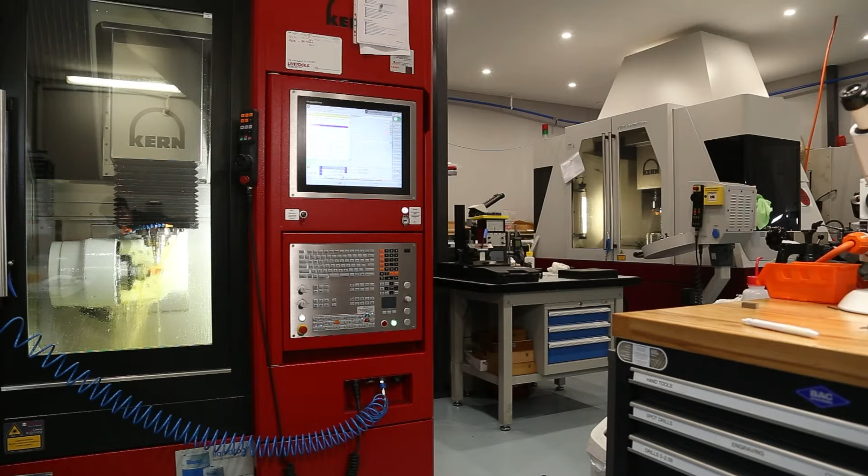I've got a little presentation here. It's going to be a bit of a ramble, but I'm going to try my best to involve some audiovisual stuff that maybe I couldn't have shared in person, just to describe our journey specifically with Kern, but more about high precision and ultra high precision manufacturing.

So my presentation is entitled Breeding Kangaroos on the Top of Mont Blanc, and it's kind of cheekily titled, but it revolves around how my dad and I almost accidentally started one of the highest precision workshops in Australia. And if I was to do it again, if I went back in time and started this journey all from the start, it would be as difficult as breeding a kangaroo on the top of Mont Blanc.

You'll see as I tell the story that we were green, more than green. We were just seeds, basically, not even trees and saplings, but we somehow made it. Hopefully that gives you guys some inspiration that if we could do it here in Australia, in the corner of the world, maybe you guys in America and Germany and wherever else you're from are more than able to as well.

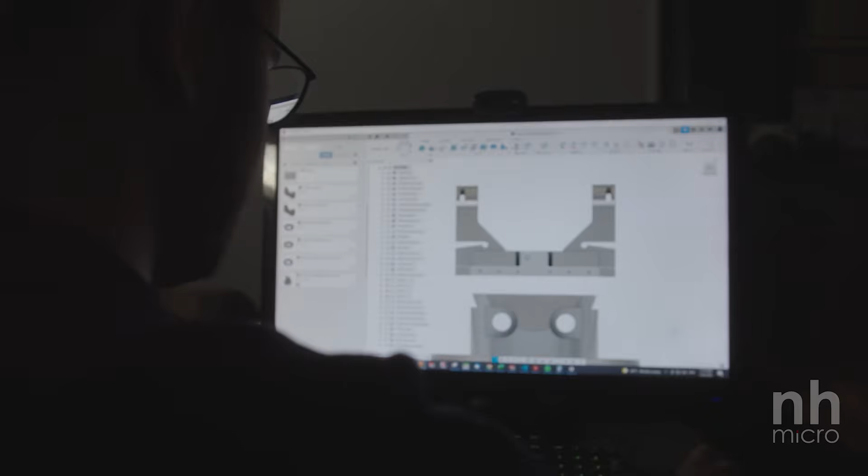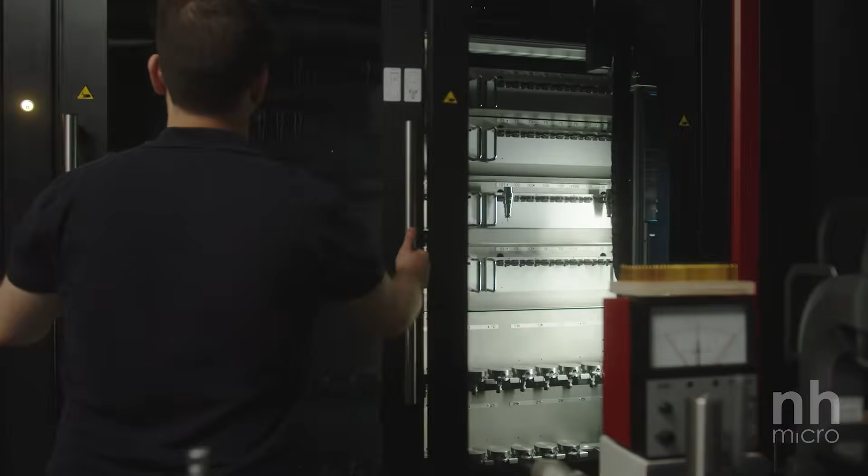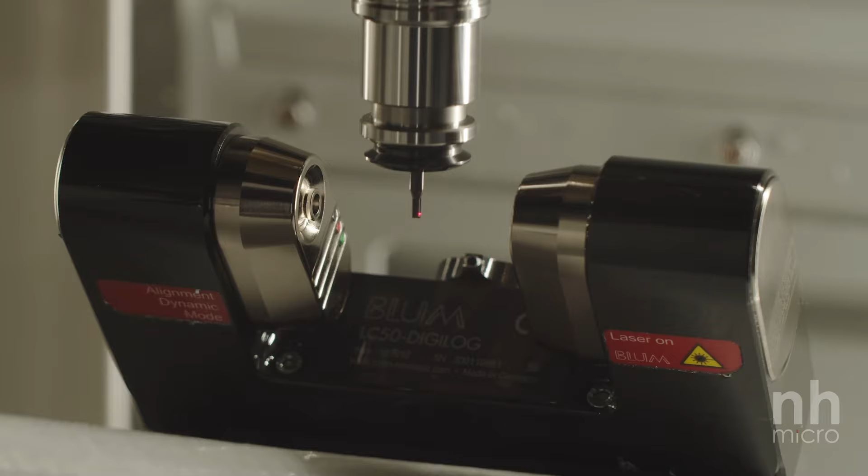As I said, my name is Josh and I'm a fourth generation watchmaker. I also run an ultra high precision job shop called NH Micro that services parallel precision industries. We have two companies operating from the same workshop here in Sydney, Australia, with about 180-ish square meters of factory, very tight, and of that about 95 to 100 square meters is factory floor, the rest being storage and office space. That's about 1,000 square feet. We packed in a lot of stuff, and we predominantly started off making watches. That was our core business.

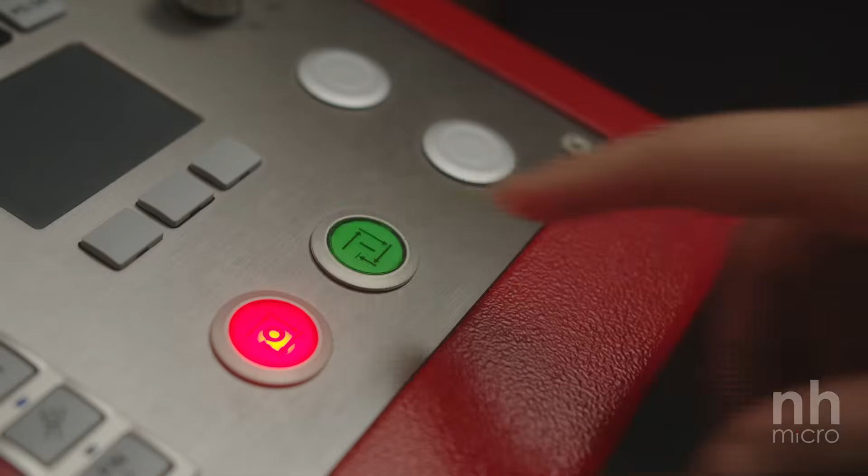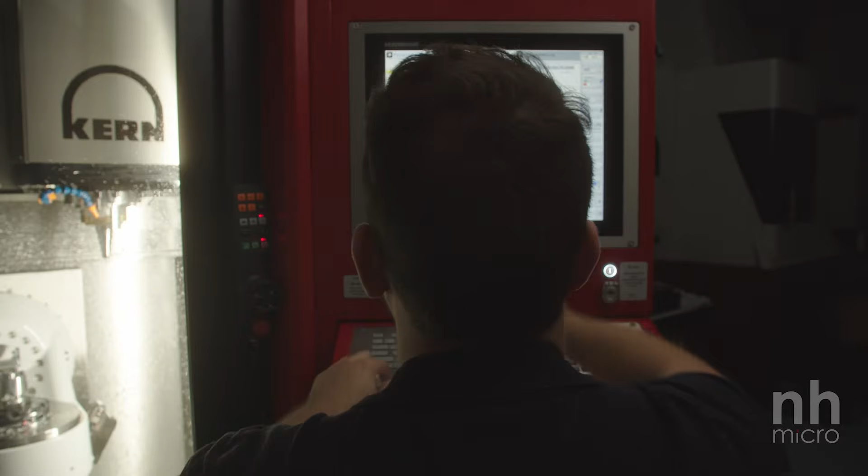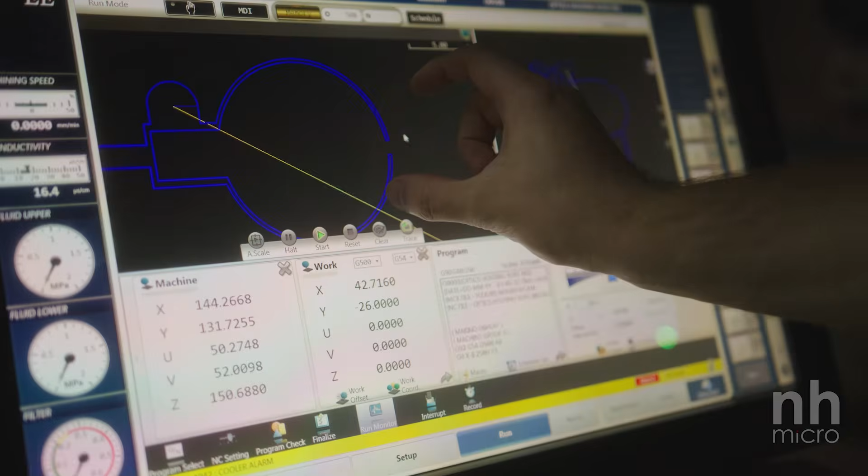So we built a workshop around watchmaking, fairly vertically integrated. We do everything from design, aesthetic design, mechanical design, manufacturing, assembly, adjustment, hand finishing, and then sales and after-sales service for our watchmaking company. Over time, that attracted the attention of local industries that were parallel to watchmaking - the medical sector, aerospace, scientific instrumentation, all these different high-need sectors, I guess was the best way to describe it. They all have very high needs.

We started serving those industries, and over time, we realized that maybe there's a bit of a market here, and started up NH Micro. So out of watchmaking, NH Micro is born, and today, about 3/4 of the way through 2025, NH Micro is about 80% of our business, and the watchmaking business is still strong and still growing, but we've just experienced a huge demand for ultra high precision products that need something close to a watchmaker's touch.

Breeding kangaroos on the top of Mont Blanc. Just imagine this. You're a refugee. You've just come from a war-torn country from Eastern Europe, and you land in Australia, and you have only one thing that's really transferable. You have a bit of cash, not much, very little in fact, and 3 suitcases, 2 of which arrive, 1 gets lost in transit, and a trade. You're a watchmaker. So you're my dad.

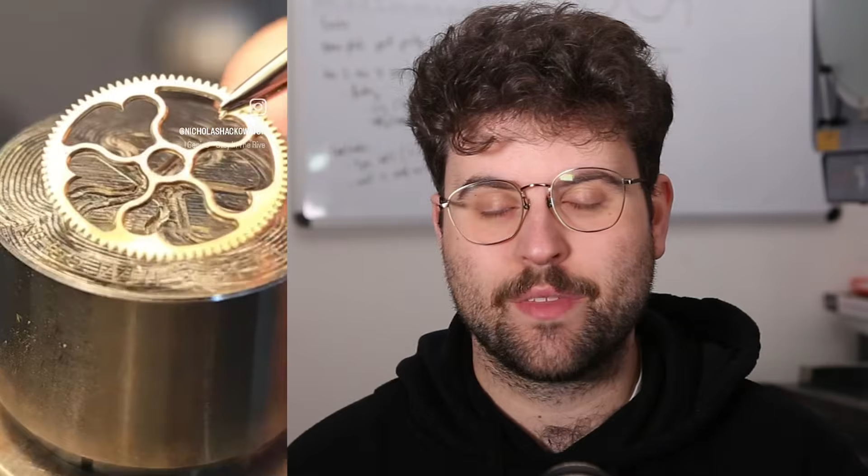Dad's basically a car mechanic for watches. In 2009, he starts to notice that large Swiss watch brands, in this analogy like the Fords and the GMs, the big players in whichever industry, started to restrict the supply of spare parts to independent repairers. This is a story that resonated all throughout America with the right to repair movement, but this was a little bit before that.

So in 2009, Dad noticed a shift. I'm not going to mention any specific brands, but if you do any digging you'll find the main culprits. Long story short, the large Swiss, predominantly watchmakers, stopped supplying spare parts to independent watch repairers like my dad. That's like Ford or GM not allowing your local mechanic to purchase a spark plug, a windscreen wiper, piston ring seals, or a head gasket. Whatever the spare part might be, restricting it monopolizes the after-sales market.

So in 2009, one or two of these large Swiss watchmakers shut down long-standing spare parts accounts in Sydney. Dad had some of these accounts and was no longer able to buy the simplest of seals to repair a watch. Repairing a watch is very similar to repairing a car - if you don't have one seal, you can't really perform a service.

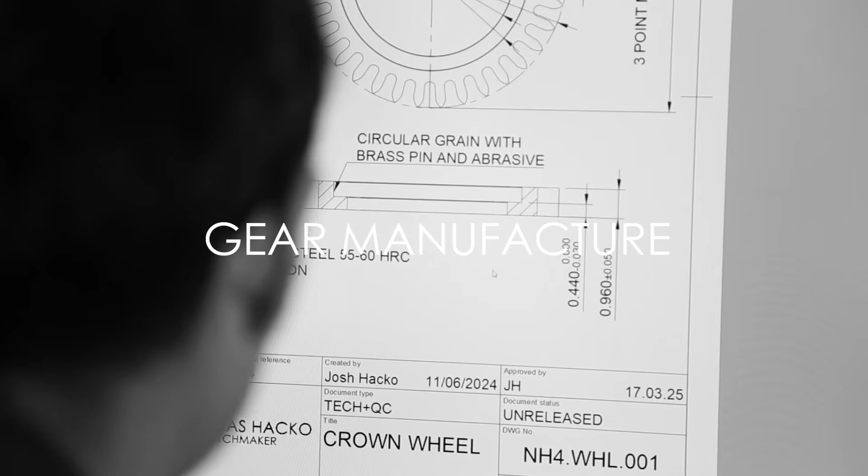Maybe some context on how industry happens in Switzerland. It's not an uncommon story, you might see it in other parts of industrialization, but it's really an embodiment of cottage industry. It's very rare for one watchmaker to manufacture every single part of the watch. There are parts that are pretty different and require a lot of expertise. It would be like a car manufacturer making the buttons on your dash, the levers and switches, all the way to boring out engine blocks to receive high performance pistons. It's a huge disparity of mechanical components in a watch.

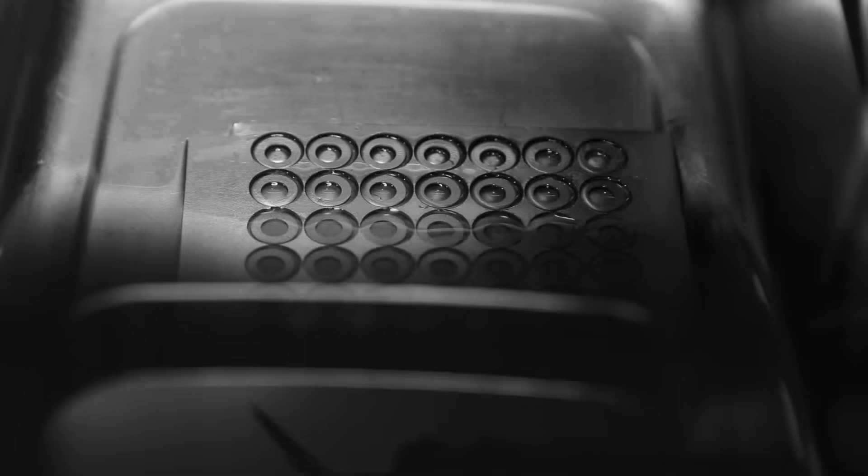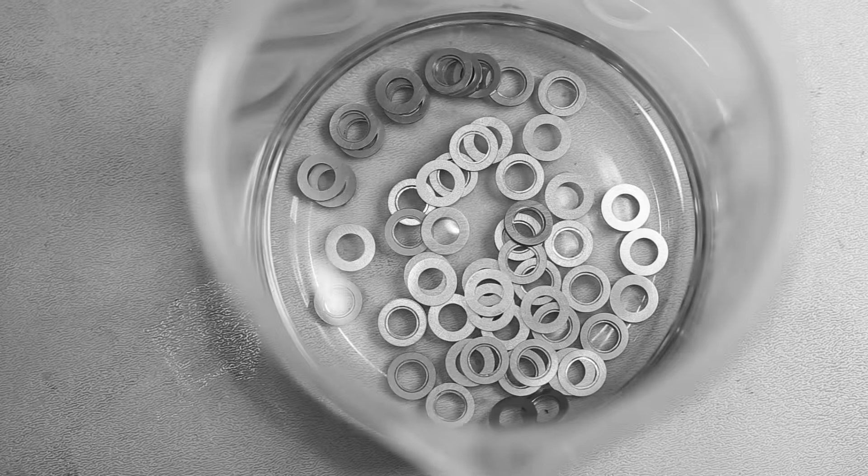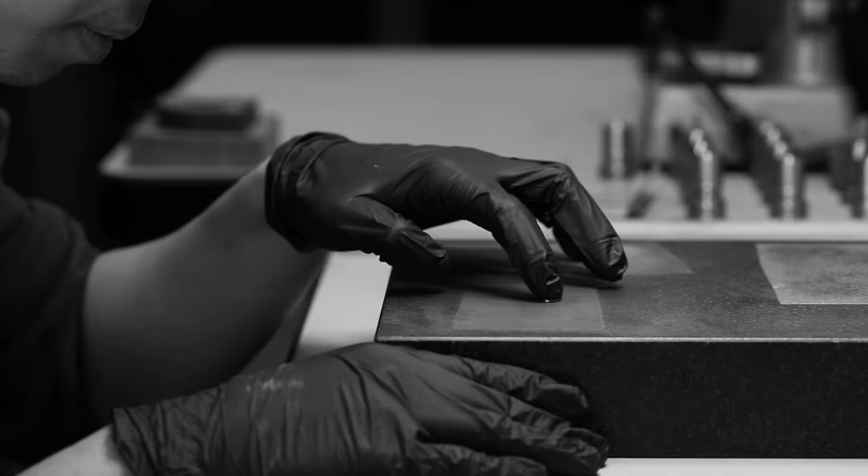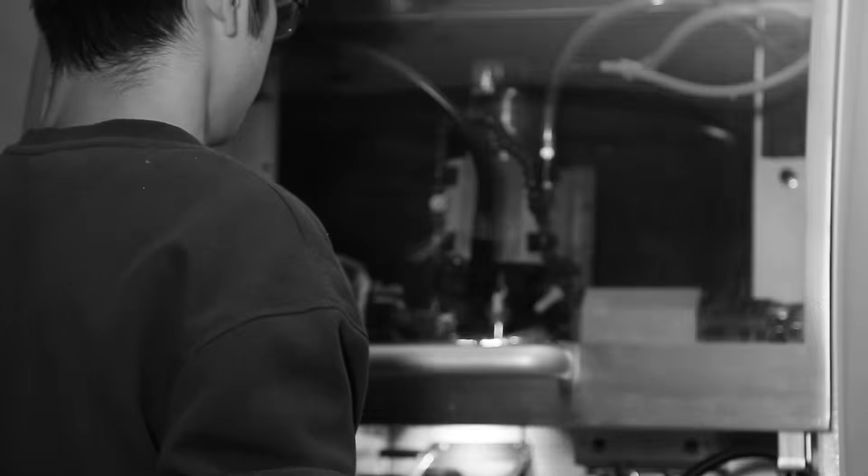This cottage industry approach in Switzerland was really common. You had Swiss farmers, basically, who were able to work during the summer and then during the winter specialize in a specific craft. It might be making a spring, or drilling out a series of holes in a piece of brass to accept the gears, jewels, and bearings. The Swiss watchmaking industry developed in such a way that you had these pockets of specialization, and only very recently did large Swiss companies conglomerate and purchase all these small suppliers to vertically integrate their manufacturing process.

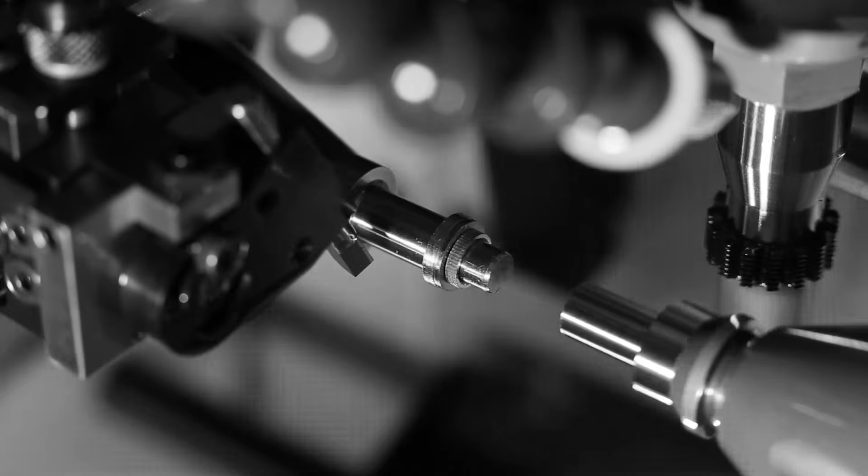Out of complete naivety, we thought we would do it all from scratch. So we bought a Swiss turning machine for small diameter parts from Citizen—maybe I shouldn't say that, but it's not going to steal any Kern sales. We bought a Citizen machine, a Makino wire EDM machine, and then a Kern milling machine. There's lots of stories about how that all came about.

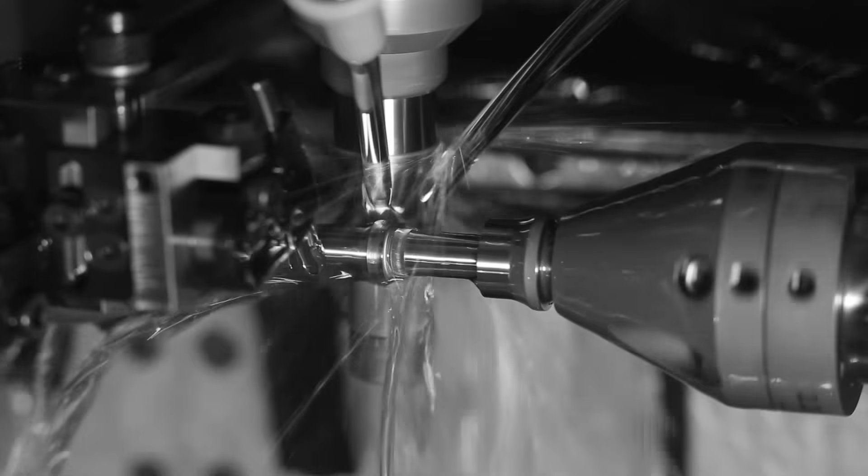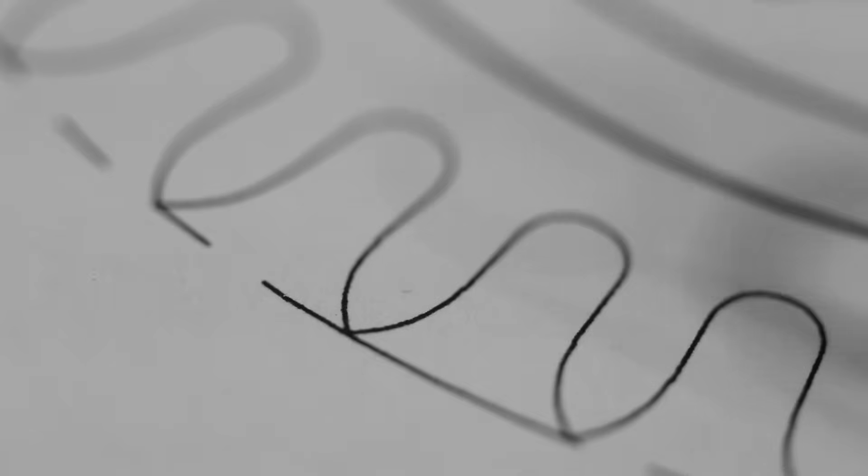Dad basically said to himself that he's not going to retire, and spent all of his retirement cash on starting up this workshop. So that's where our journey with Kern started.

I know it's a bit late in the game, we're maybe 20 minutes in, and I'm only just mentioning Kern properly, but I didn't even know what a milling machine was, and the first thing I bought to make milling parts was a Kern Pyramid Nano. So we really fell headfirst into what manufacturing was.

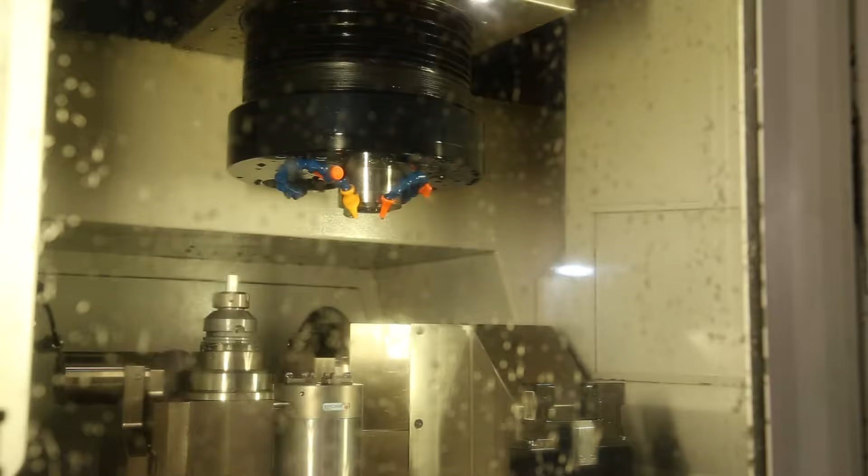From a technical perspective, it was like an HSK 25 machine, so tiny little tool holders, tiny little tools as well, and a fairly advanced machine control with a Heidenhain—a very complex machine.

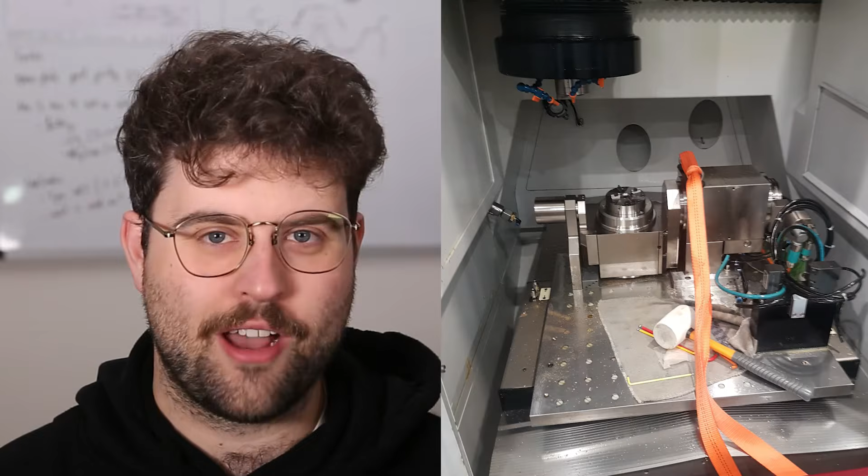It had pneumatic systems, a hydraulic system, and a hydrostatic system, and it was a second-hand machine, so all these systems started yelling at you—presenting problems fairly early on in our ownership of the machine. Looking back, hindsight's 2020, I probably should have just bought a brand new machine.

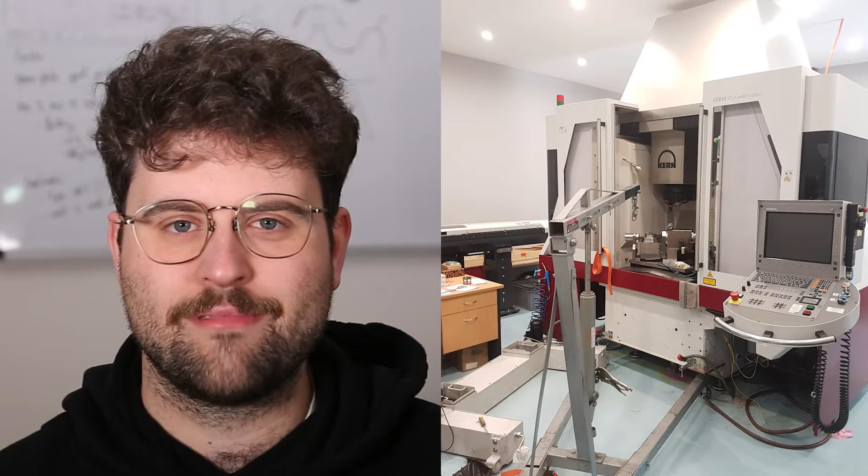But we learned a lot, and that was another underline in our journey. We were just so sponge-like in our learning, partly because we had no choice—we'd made all these investments in cash and didn't want it to go to waste. So we had to learn.

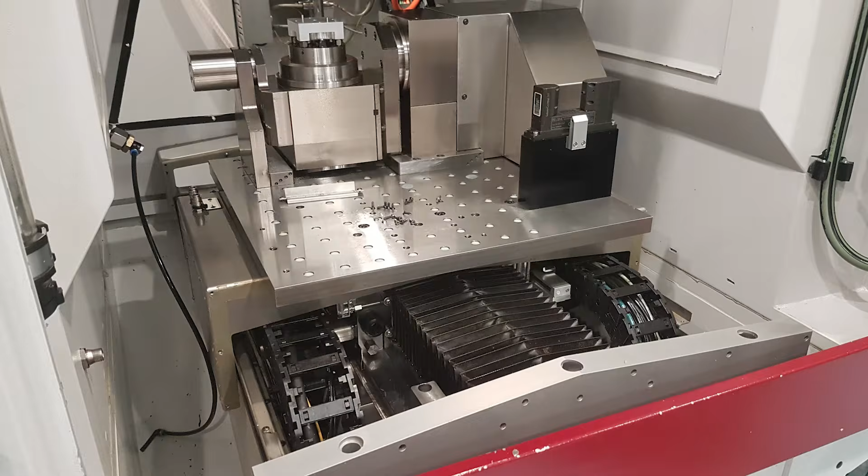I'll tell a story about how we got in touch with Kern. We sent off a bunch of emails to people we thought made high precision machines, mainly based off their YouTube videos. It's like, oh, they've put up a YouTube video and you can see a watch part—well, that machine must be able to make watches. So we sent off all these emails, and Kern replied, but they were really confused as to why there was an inquiry from Australia from a @hotmail.com email address.

Honestly, I kind of forgive all the other machine tool suppliers for not replying, when Kern accidentally did, maybe. They said, oh well Mr. Hacko, here's the catalog, feel free to ask any questions, and didn't think much of it. About 2 or 3 months later, in 2016, maybe October-ish, Dad and I said there's no use just sitting in Australia—let's go to Germany, to this fair called AMB in Stuttgart, to really understand what these machines are, to see how big they are, and whether we can fit them in our 2-car garage that doesn't have 3-phase power, a slab, or air conditioning.

What's the mechanical and physical constraint of setting up a workshop? So we went to this show, at the same time we started buying all the other machines. I met up with one of the Kern salesmen called Udo, who handles the Asia Pacific market, and he said, why don't you come over to Murnau or Eschenlohe, which is about a 4 or 5 hour train ride from Stuttgart.

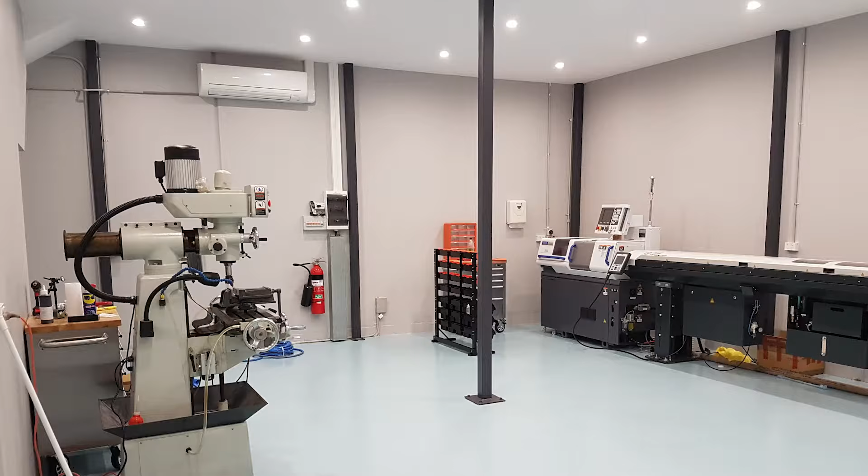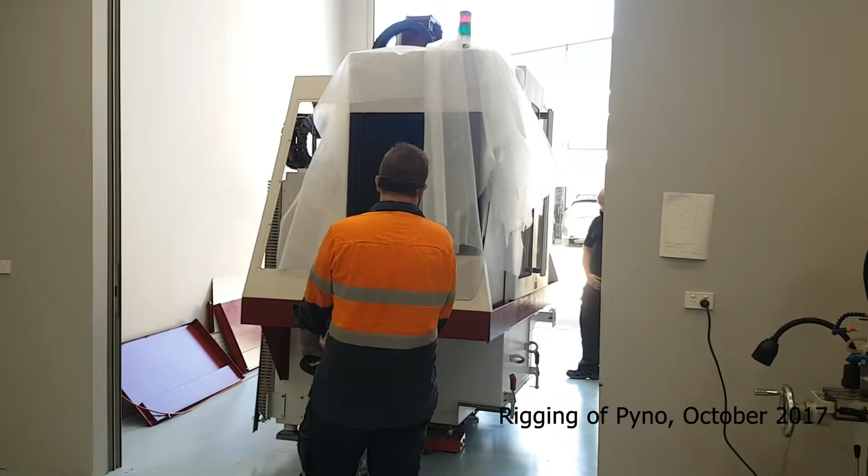So I call out my dad and say, I think this is the right machine. It says Kern on it, and Rolex on the back. Maybe we should buy it. Sure enough, we placed the order that afternoon, and about 6 or 7 months later, we're installing the machine in Australia. And that's sort of where the journey kicks off.

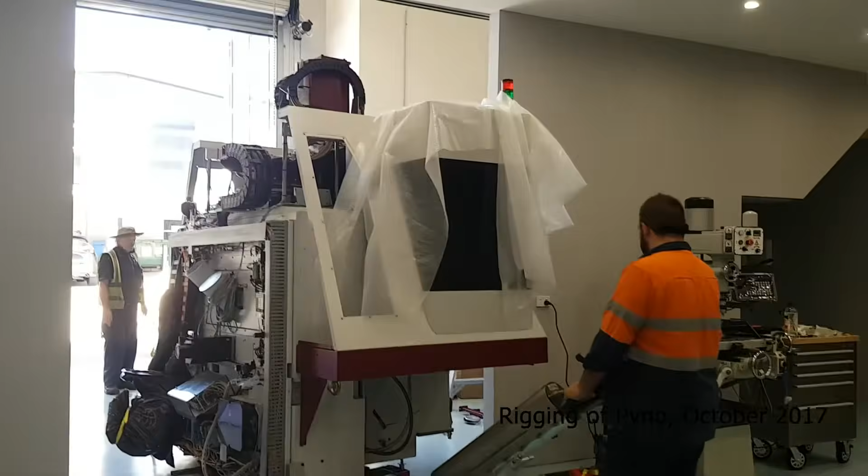We learn a lot. We break a lot of tools. We waste a lot of material. We do a lot of eBay and YouTube and Reddit corporate espionage, trying to find out what tools other people use and this and that. About 2 years later, we cook up a watch.

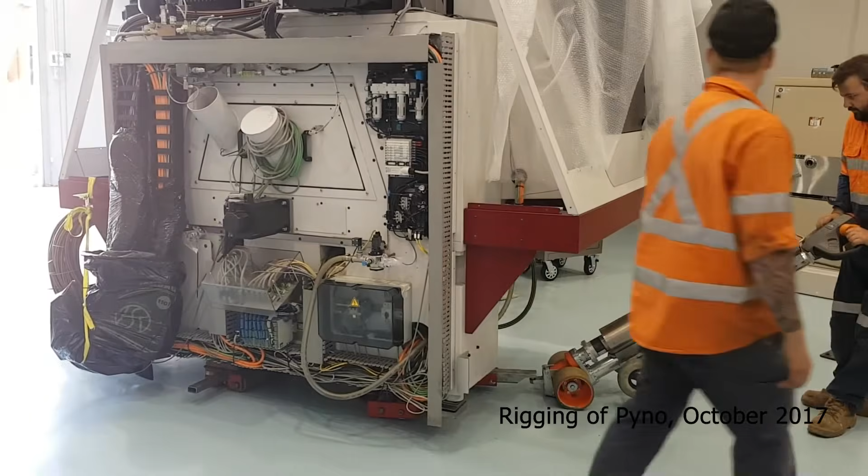Actually less than 2 years — it was about 18 months later we release a watch. That means we'd done the production and everything. We learned so much from that first watch. It was called the NH1. And that watch basically taught us how to make a watch.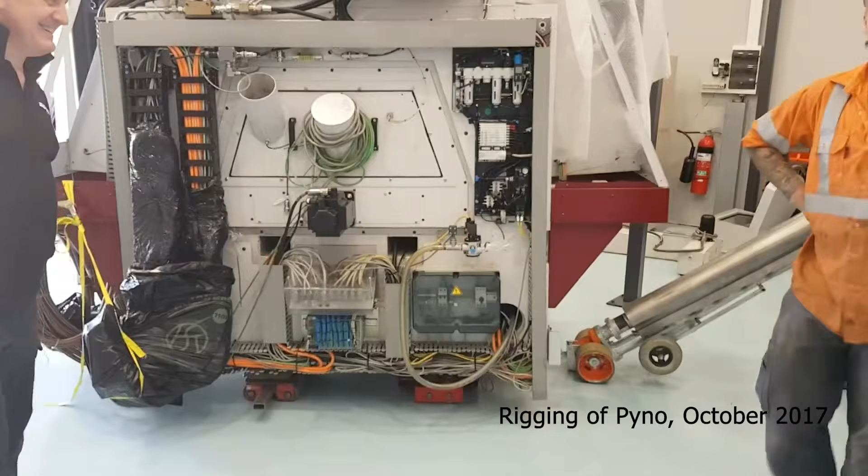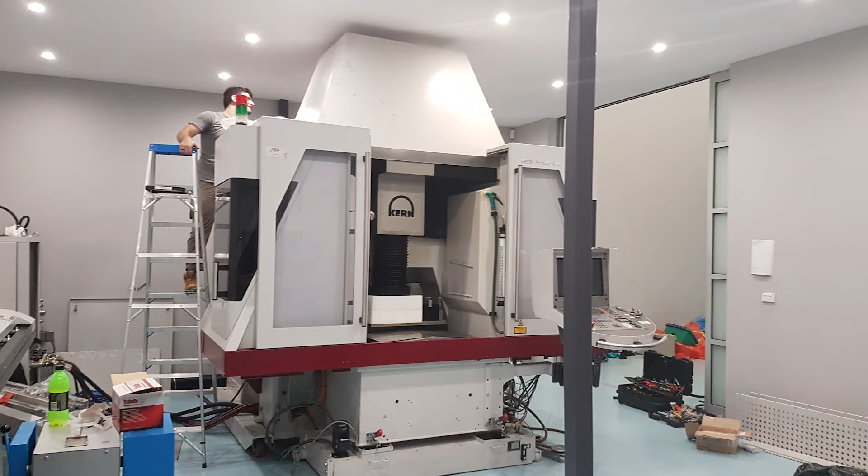At that stage, about 40%, maybe 50% of the components were made in our workshop. That was the lowest hanging fruit. To get another 10%, 20%, 30% of the components would have required a lot of time, and it has — so we're up to maybe 85, 90% of the components, and it's taken a hot minute.

The only takeaway I can really draw from that starting experience was that we were too green to even understand the mess we were getting ourselves into — the money, the time, the sleepless nights.

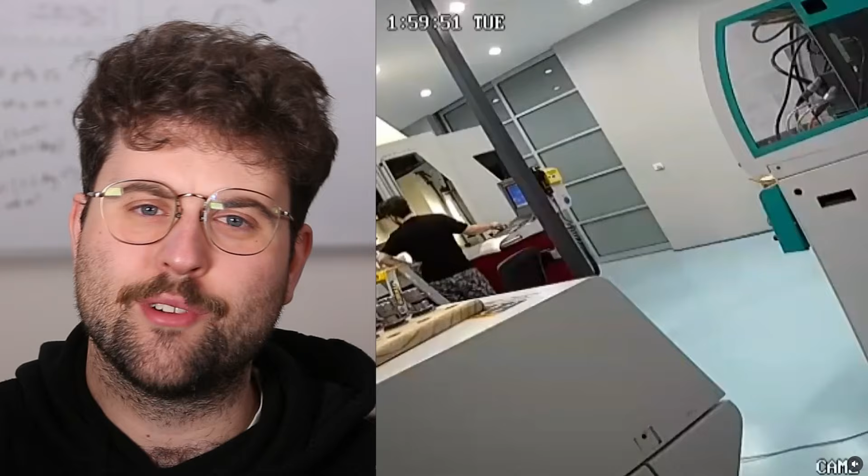There's a video deep on our watchmaking Instagram of me wearing pajamas in the workshop — security camera footage of my dad logging into the cloud-based security camera and recording me at 2am making watch parts. I was just so fervent, and still am, so fervently obsessed with making something that's a pursuit for perfection, or some very precise, intricate thing.

And the beautiful thing about the naivety that we had is that we didn't know when to say no, when to say stop, this is beyond our capability. We had no idea it was so far beyond our capability that everything should have been no, so everything became yes. The caveat is that we had two other businesses that were sort of supporting our watchmaking business to stand up, servicing and buying and selling high-grade Swiss mechanical watches. If we were trying to do this on the turnover alone of starting up a watch, it would be impossible, or at the very least much, much slower.

But things started to move. We started to sell watches and build a bit of a local market. At that time we'd also had a bit of exposure to what it felt like getting a drawing, making a component, measuring it to the best of your ability, putting it into a watch, and seeing it work. So we saw that chain, and as soon as these parallel precision industries started knocking on our doors, I felt that we could help, that we could somehow offer some small element of expertise. Like we had done something difficult, making a watch, and maybe it was transferable to something else.

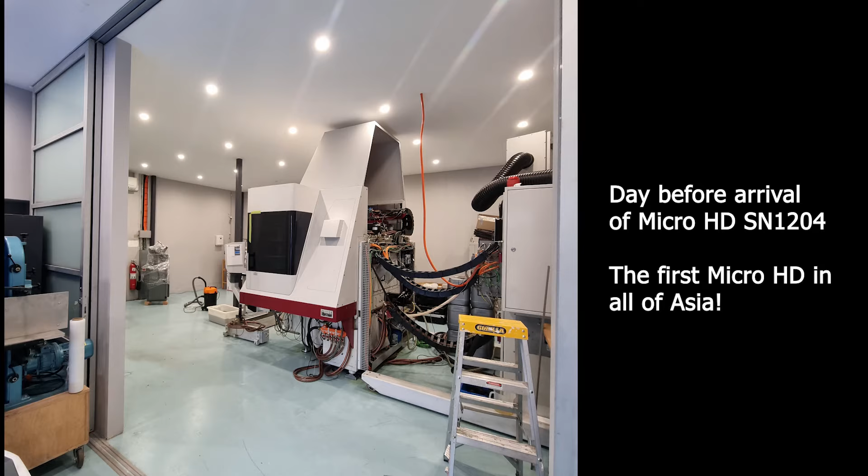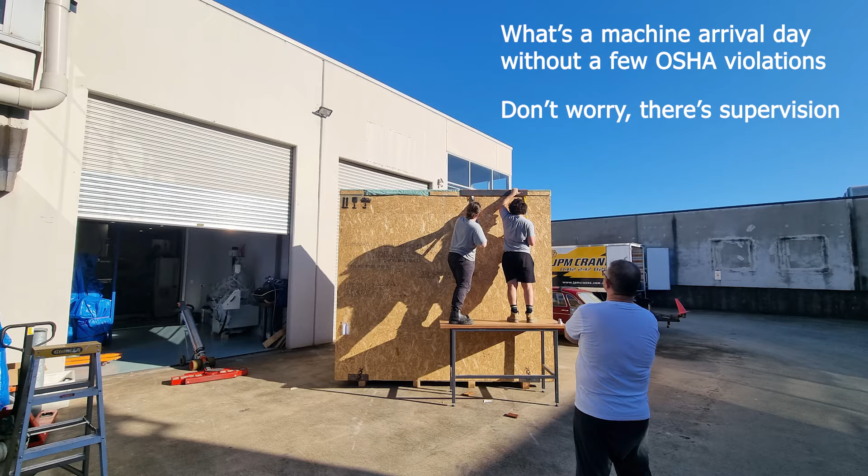One of those moments was when we bought our Micro HD. Looking back, this was probably the most visionary decision that my dad made. We had some issues with the Pyramid Nano that were starting to get a bit annoying. We'd booked in enough work for our own internal watchmaking, as well as our external client-facing work, that the Pyramid Nano became a staple in our manufacturing process. And every time it was down for a week or two, or even months, it would really, really hurt.

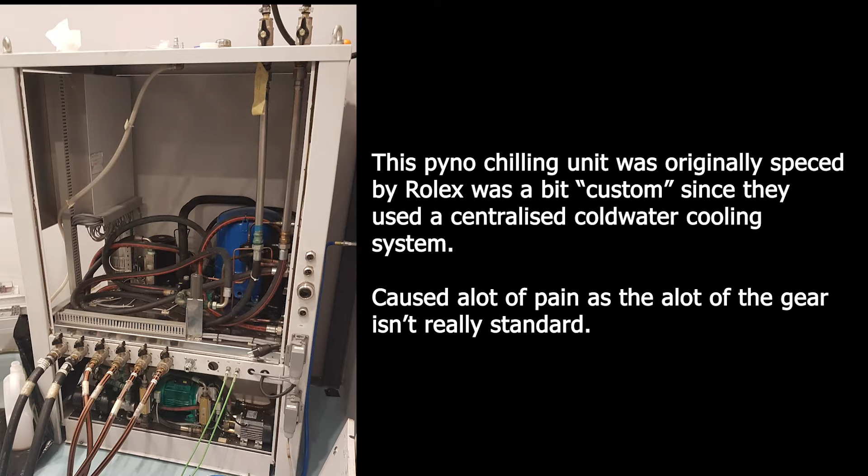So I distinctly remember we had an issue with a chilling unit, and it basically wasn't working. One of the pumps had failed, and the new pump was like two weeks away, plus maybe a week of backwards and forwards between customs, shipping, and install.

So around 3 weeks of downtime. I had my head in my hands, and I went to Dad and said, look, this is just not working. Something, we need contingency. Do we buy like a cheaper machine that feeds the Pyramid Nano? And he sort of just said, what's the best machine that Kern makes?

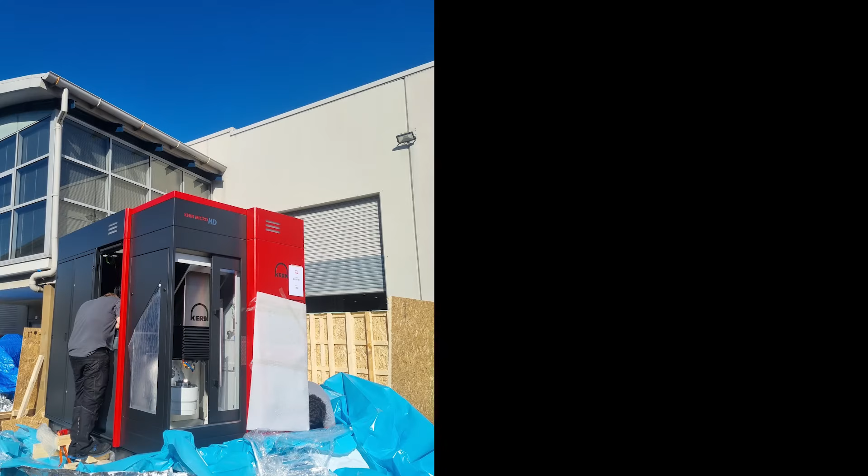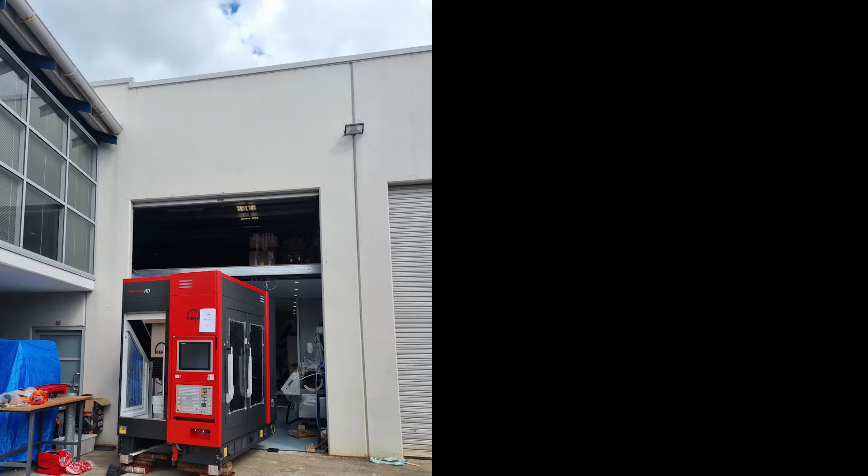That was his response, and I am eternally grateful to have a dad like that. I didn't even want to buy the best machine that Kern had. I was a precision geek, but I was not ready for that level of perceived risk. But he thought about it differently. It's taken a few years for me to understand.

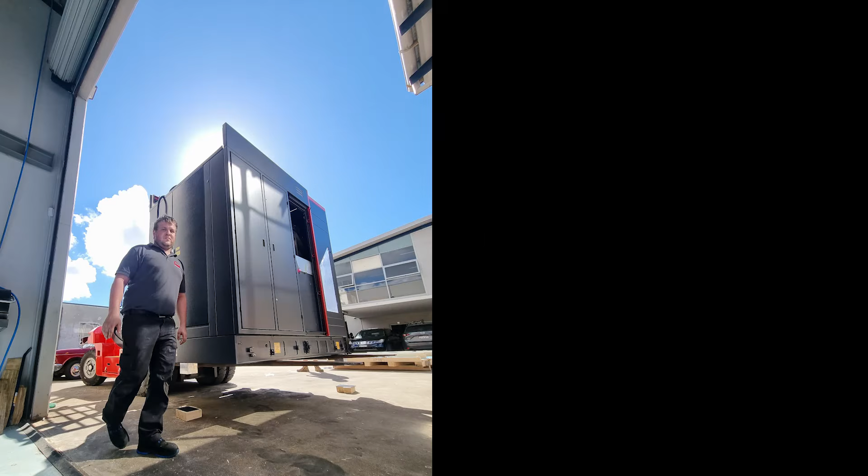But he recognized that the team we were building, so now we have about 10 people between the two companies, was capable. And to take that team to the next level, you needed a resource to pull and ultimately push the team to places that the current equipment set couldn't take them. So he said, yeah, what's the best machine that Kern makes?

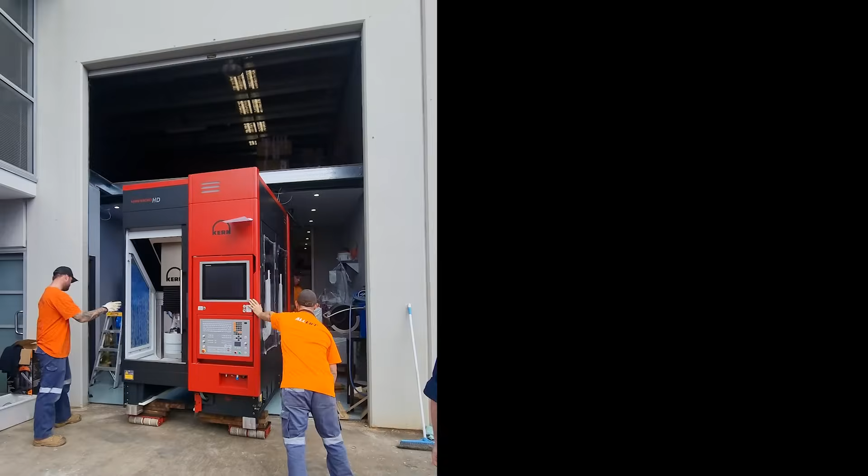At that time the Micro HD had been out for about a year or two, and we started the process of speccing out a Micro HD. That really changed NH Micro completely, because now every single milled watch component was well within reach.

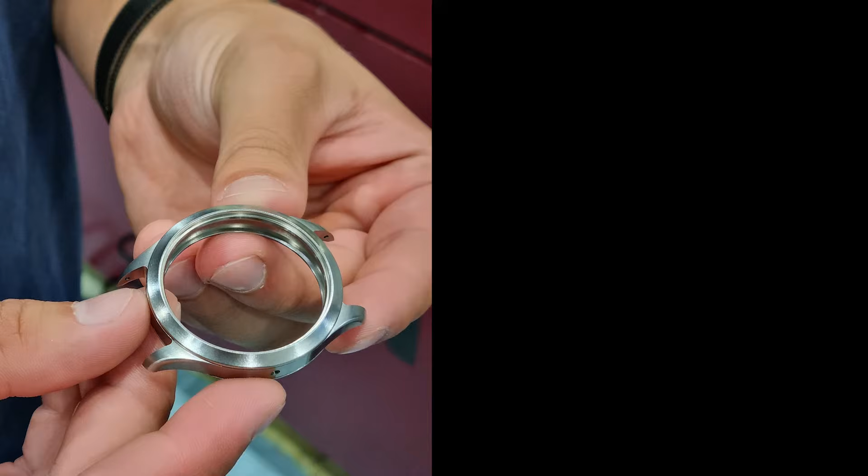It was already well within reach on the Pyramid Nano, but maybe we could make some larger parts, like a case for example, and also stabilize the high precision components, like the main plates and bridges in the watch that have very, very tight tolerances, that the Pyramid Nano needed longer times to warm up and some tender love and care to really get the max out of. The HD would just do it in a breeze.

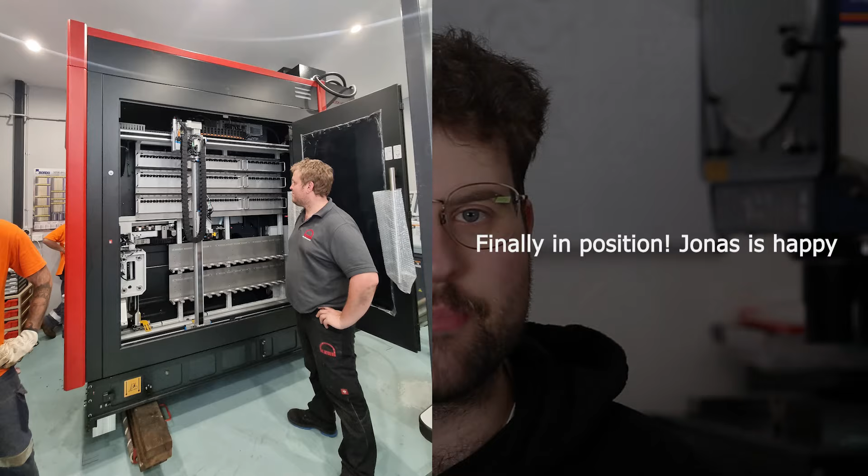It opened up a door for contract manufacturing where we could start to rely on the machine. A brand new piece of equipment, and then rely on an ultra high precision machine, to the extent that all the metrology we had at that point was rendered useless. There was just no way we could measure the parts coming off the machine.

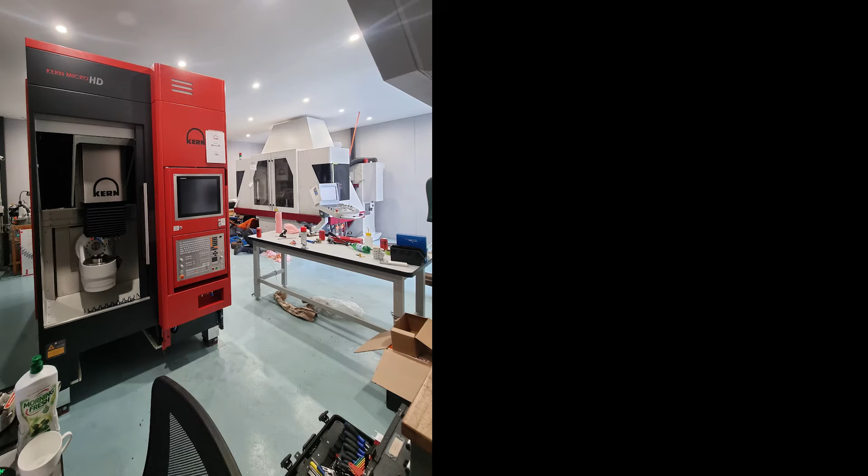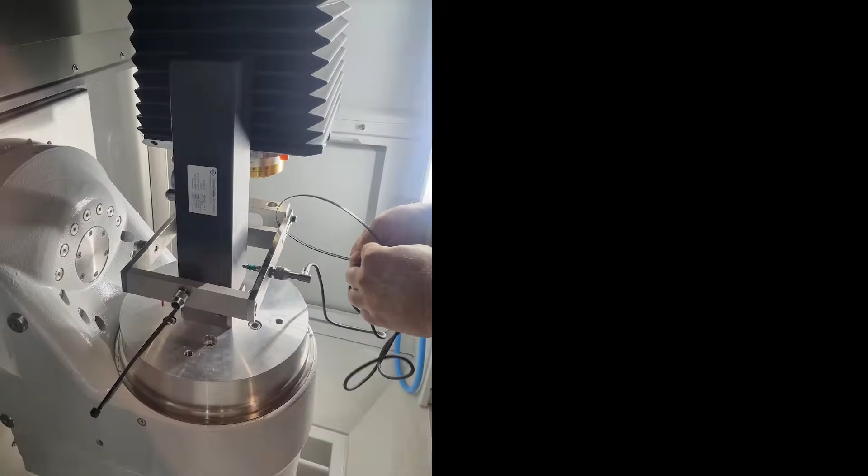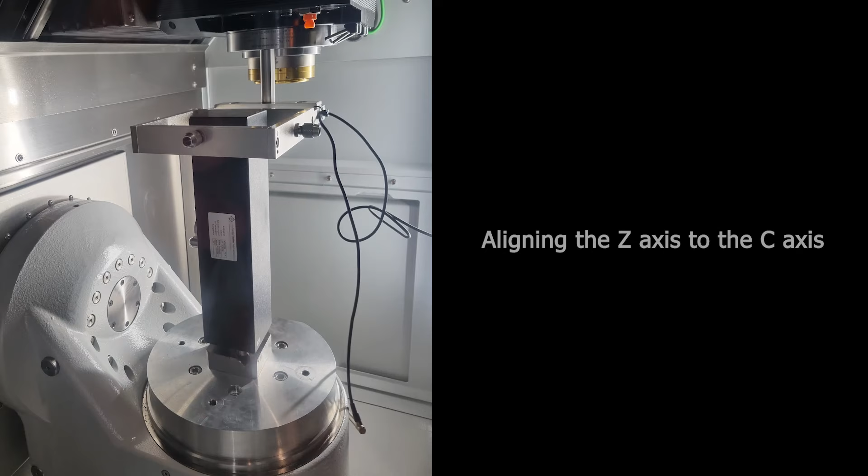So tangibly, what that meant was our existing customer base now had access to a very, very high precision machine, and our future customer base was attracted by that machine. Some customers come to you because you have some level of expertise. You are known to be the best metal to glass seal supplier, and you're really good at that. Or maybe you make nylon string for fishing, and you're just the best at that.

But some customers come to you because they know how their product should be manufactured, and that it should be manufactured on a very, very high-end machine, and they start looking for high-end machines and vendors with high-end machines. In a similar way that I would look for a wire cut part to be manufactured by someone with a wire cutter, and a turned part by someone with an XYZ turning machine.

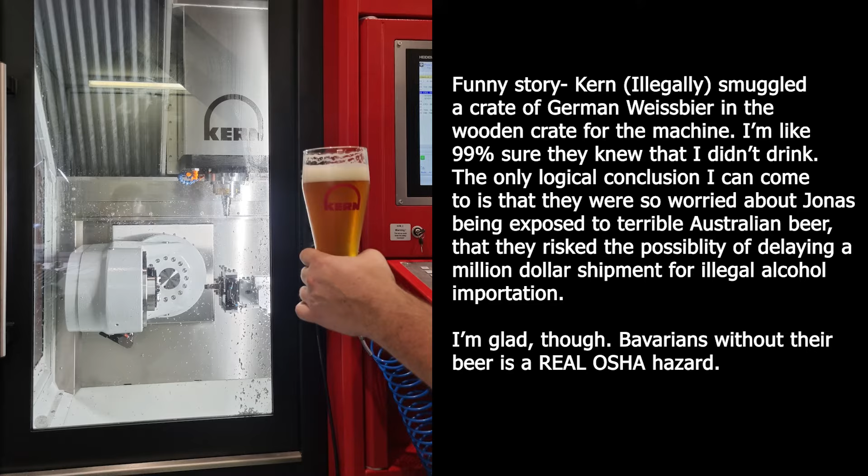So we started to get customers that knew we had purchased this Micro HD, and started coming to us. Can you make this part? Can you make that part? And it was very exciting, incredibly exciting, and we sort of said yes to everything.

That naivety was still as strong. I think that naivety is still here, because I am saying yes to a lot of projects. But I've also learned where the limits are, and that's been good, very, very positive.

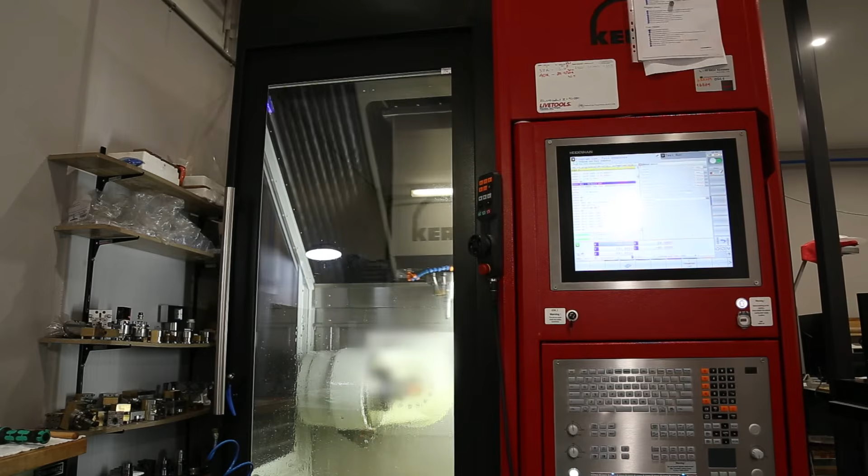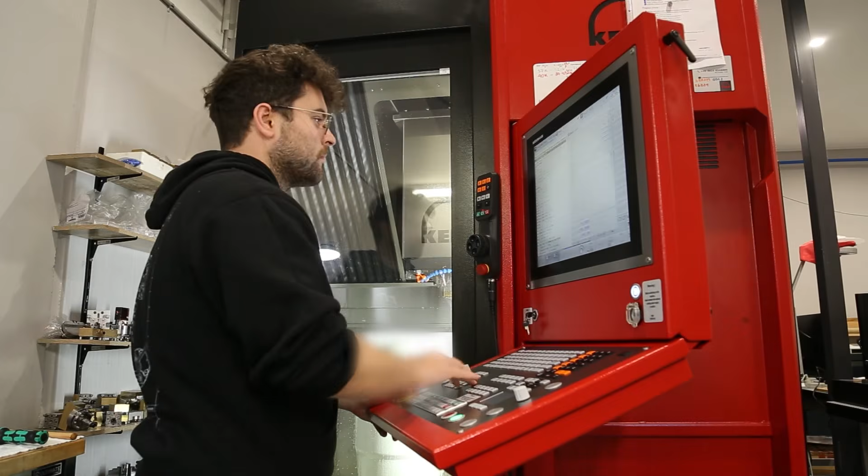Alongside that new machine, so stability in production and uplifting capability, we'd really started to access the institutional knowledge that Kern had about making these high precision parts, whether that was the types of tools, the types of strategies, the types of work holding, all these things you might not ever learn yourself, or if you did try, would cost a lot of money and time.

We started accessing that by buying basically a brand new machine and getting deep into the application side of Kern. So yeah, this was, I would say, one of the biggest turning points for NH Micro. Before that, NH Micro almost didn't exist, and the machine that took NH Micro to where it is today, as 80% of our revenue, is that machine.

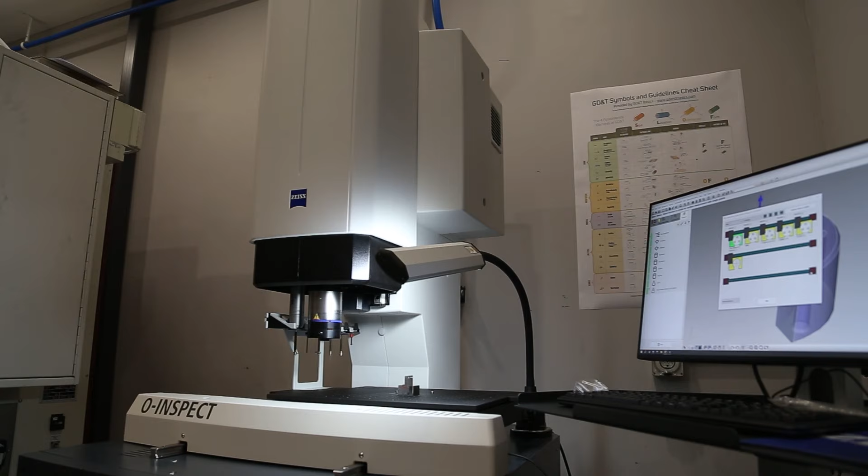The second big inflection point that we felt was - it might not have been second chronologically, but in order of importance it was the second biggest one - was us purchasing our measuring equipment. Our CMM came about maybe 18 months ago, roughly. We bought the machine 18 months ago, and it's a Zeiss CMM, optical and tactile, an O-Inspect 322, and that really transformed our ability to market ourselves as an ultra-precision solutions provider.

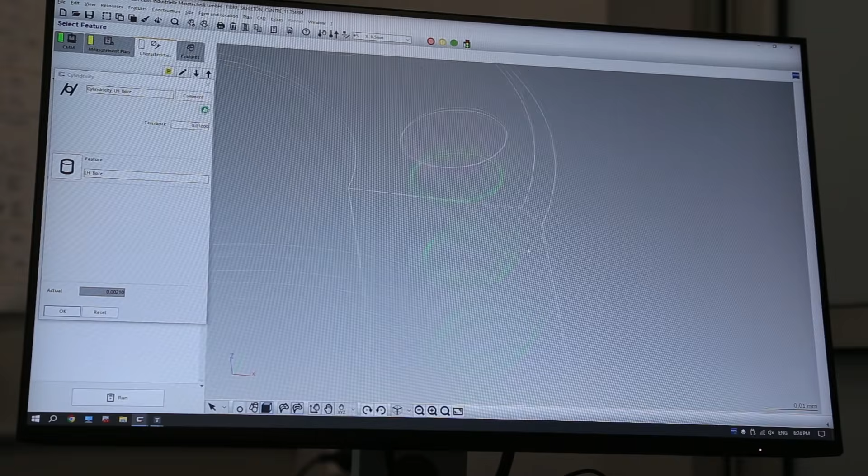Up until that point we had, I guess, general metrology capability - profile projectors, surface plate metrology, hand tool metrology, pin gauges, bore gauges, air gauges, LVDTs, things that are still used daily today. But having an ultra-capable metrology platform suddenly validated the results that were coming off the HD.

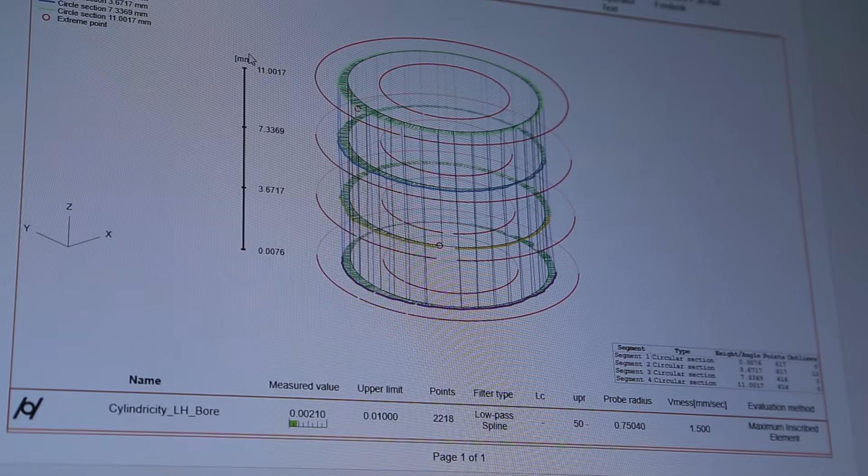And this really brings me into this overarching theme that I wish I had talked about earlier in the presentation, but it's that precision is a chain. You might have heard this before - precision is a chain, and it's governed by the weakest link in that chain.

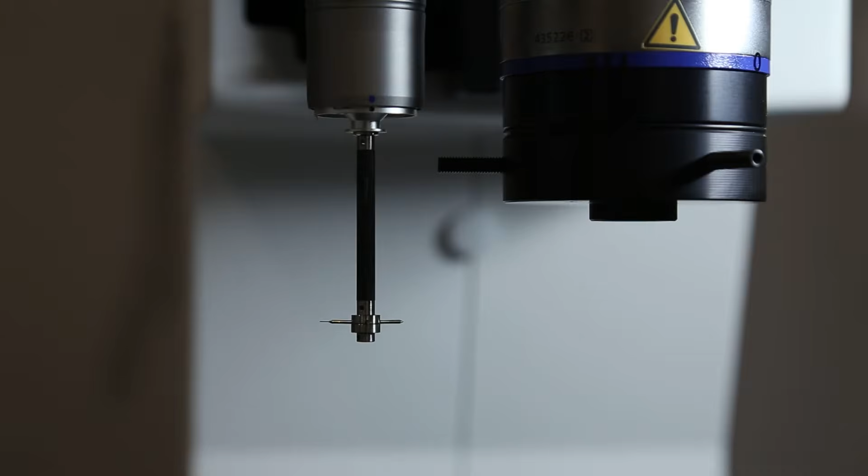In that chain you have everything from your facility, so your environment - whether that's the vibration coming through the floor, your temperature, your humidity, your temperature delta, the temperature shift between the roof, your ceiling, and your floor. It's bucketing here, so if you hear some noise in the background, that's why. You've got the temperature delta vertically, temperature delta spatially, temperature delta temporally.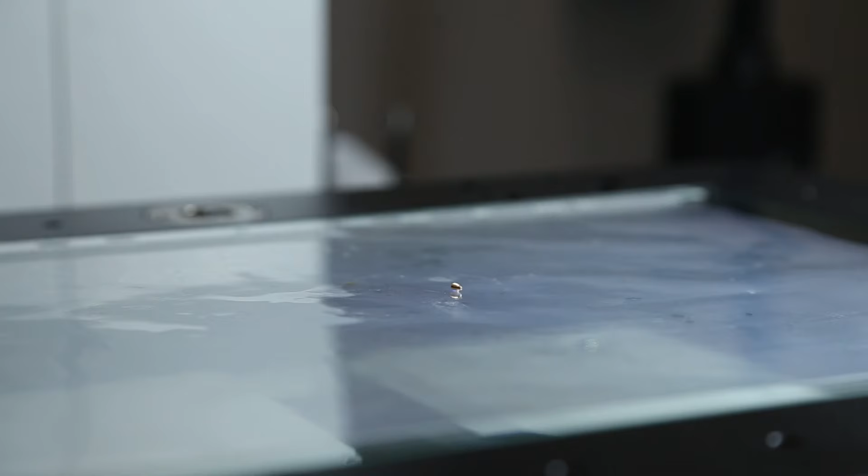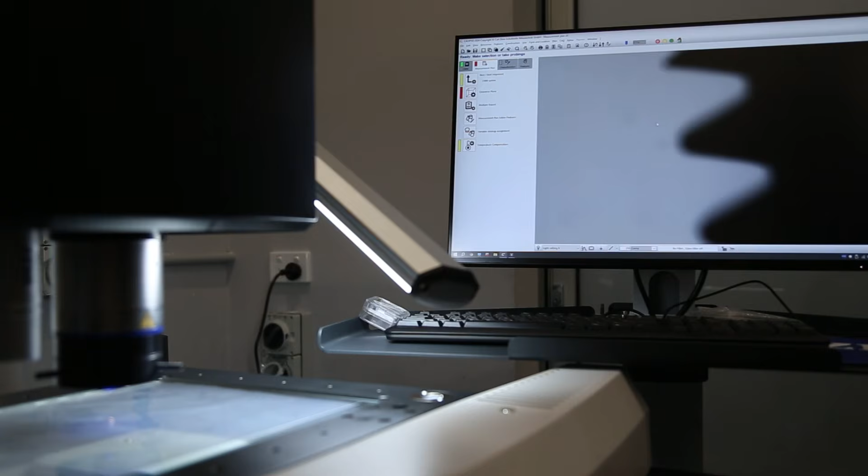Then you have things like your program - what CAM software are you using? Is it capable enough to generate 3D surfaces, or fast enough to process complex 5-axis toolpaths? And then you have some more tangible things like your work holding, your tool holding, the tools that you use, and finally the metrology. There's a lot of links in that chain - a lot of little tiny links you might not spend a lot of time thinking about, like your coolant, for example, that all impact the strength of this chain.

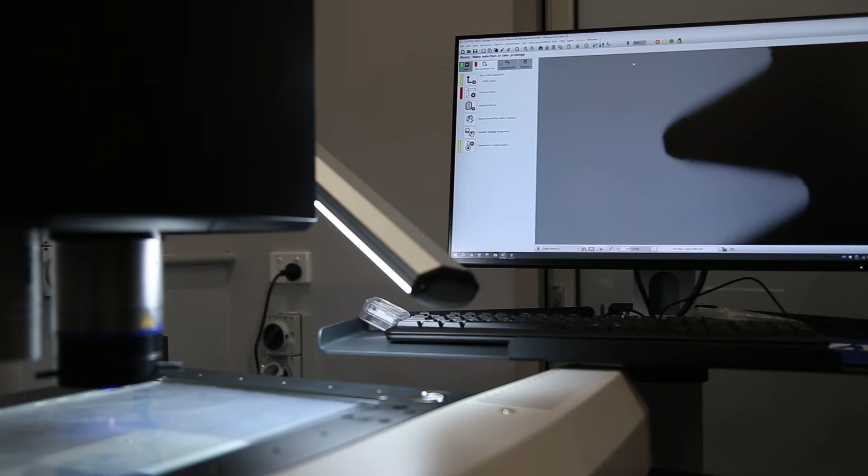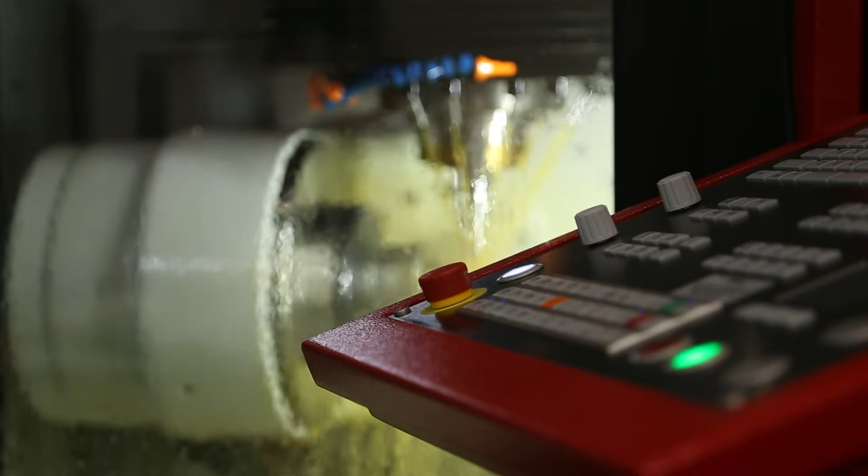One big thing we solved very early on by partnering with Kern was the machine. The machine is often the weakest link in the chain, especially if you're machining big parts and suddenly have to make small parts, or precise parts, or complex parts. These sort of general machines stop being able to perform. But purchasing a Kern as your first milling machine solves that very, very quickly, and it doesn't become the weakest link. You become the weakest link, and you have to push yourself to really maximize the capability and eventually capacity of the machine.

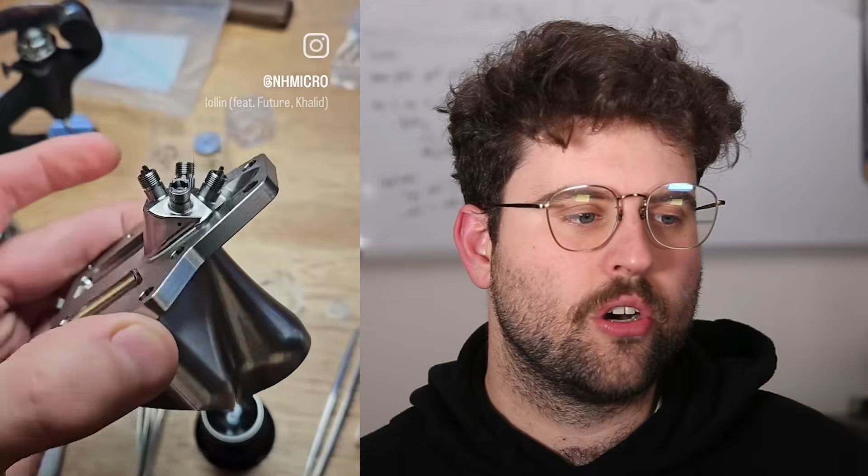So this chain that we've developed at NH Micro - the inflection points in the business are really the uplifts in the weakest links of the chain. Now, maybe 5 years into running NH Micro, we still have weak links in the chain. Now it's things like capacity planning - how do you make sure the machines are well utilized, and how do you get really efficient at automating the machine?

What kind of safety do you put into your standard operating procedures so the machine's safely automated? It's not just running parts that can crash the machine. Is your post well customized so it's doing tool breakage detection? And when it does, does it put everything back to where it's supposed to be, and are your planes reset? All these small things become your weakest link.

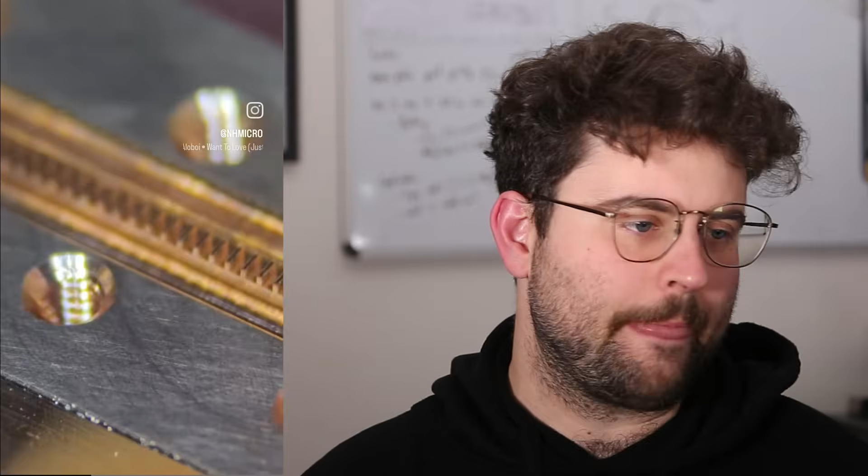Overall with NH Micro, we're not thinking about the machine, we're not thinking about the tool holders, we're not thinking about things like the coolant. Work holding is always tricky - I don't profess to be an expert at that. But partnering with someone like Kern teaches you at a very base level what type of chain you should be looking at, and what type of tool holder you should pair with an ultra high precision milling machine.

You can see on our Instagram we're pretty open about a lot of stuff, except maybe the customer parts with the NDAs, but how we make those parts is pretty clear. You try to use the best possible version of every single link.

I also wanted to speak a little bit about, and this is getting more technical, so forgive me, but I think most of you enjoy the technical stuff. I wanted to talk about the transition between something like a Pyramid Nano, which was designed 20 plus years ago, and something like the Micro HD, and why that's important for a business that's constantly changing parts.

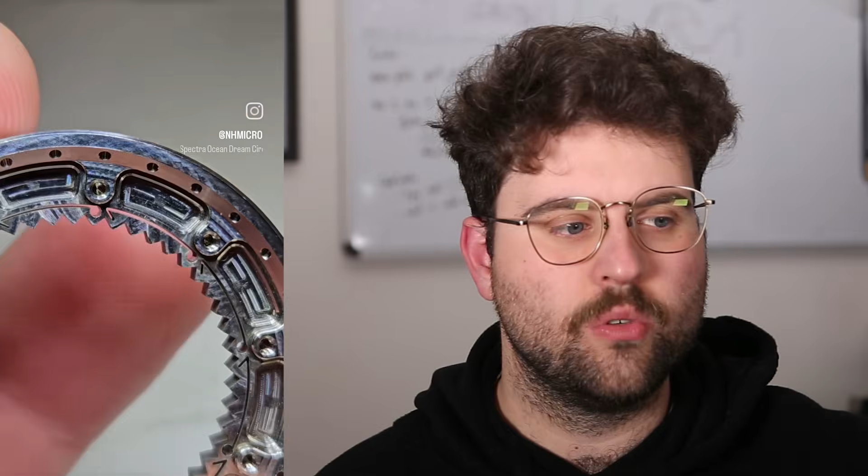The Pyramid Nano is an incredibly accurate machine after the second day of operation. After 24 hours, and really into the 48th hour plus, the machine hits this plateau of stability. It's a very large machine, made from steel construction. The hydrostatics are great, but they put a lot of oil that needs to be cooled into places where maybe it's not cooled well enough.

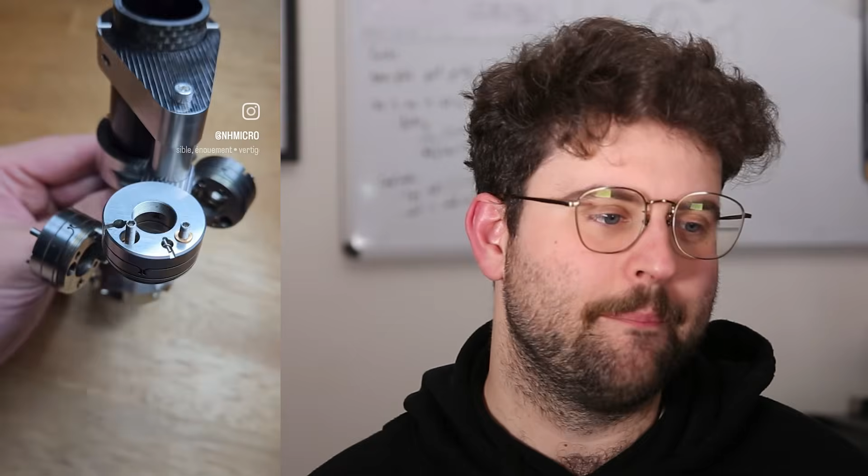It's also a 3-axis machine. We have a trunnion, a 4 and 5 axis attachment to the machine, and it really is an attachment. It's sort of closer to a modern day jig borer or jig grinder than a high precision 5-axis milling machine. I feel comfortable saying that because we've used it now for almost 10 years and figured out how to extract the absolute maximum from the machine, and also where it falls down. If you're making the same part over and over again, never turn the machine off, your room's really well air conditioned, and you have a stable tool life and tool management procedure, it's great. It's a fantastic machine and it taught us every single thing we know.

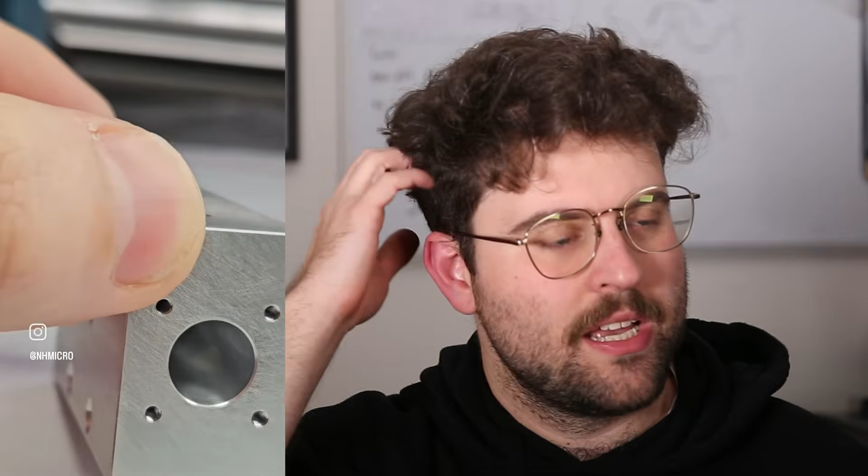However, the big step change with something like a micro platform machine is that suddenly you're not waiting 48 hours for the machine to cool down. You're waiting 20 minutes, 10 minutes, reaching that plateau of stability after 10 to 20 minutes. You suddenly have access to a much more rigid 5-axis platform that's designed to be a 5-axis platform, not a jig borer with an attachment on it.

And then the quality of life things, having this huge tool changer cabinet that you can open up, change tools out, pick up a whole rack and start changing those tools out offline. You could do some of those things on the Pyramid Nano, but it was not really an ergonomic solution. And it's weird, I'm not trying to sell the machine.

You guys, half of you probably own them already, but what I'm trying to illustrate is that for NH Micro, if we didn't have that stability and the ability to change between micro machining an LSR mold for a cochlear implant, all the way to a waveguide for satellite communication, all the way to roughing out aluminium enclosures for gyroscope housings, and then XY—if we didn't have a machine that could stress that chain for us and not break, NH Micro wouldn't exist.

So in that chain, it's abundantly clear that my dad's decision now 4 years ago was visionary. The only issue is I don't think he thinks it's visionary because he doesn't even know how to turn the machine on. But he knew that we just needed to access the best link in the chain. And maybe it became visionary because we partnered with some of the best people in the industry.